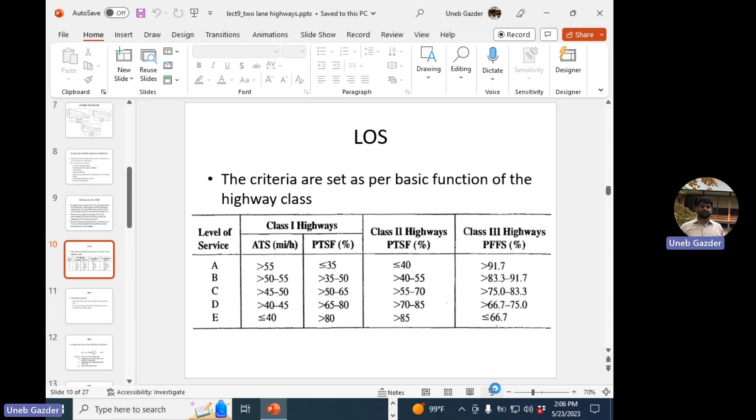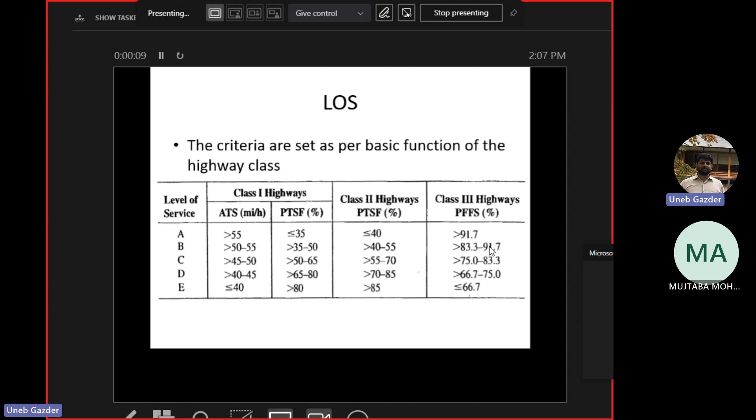Okay, you asked him about time. When I started teaching, I was teaching in Pakistan. I used to teach in T-shirt and jeans. The weather is like this. Sometimes they have AC, sometimes no. Never had AC. Sometimes the fans were okay.

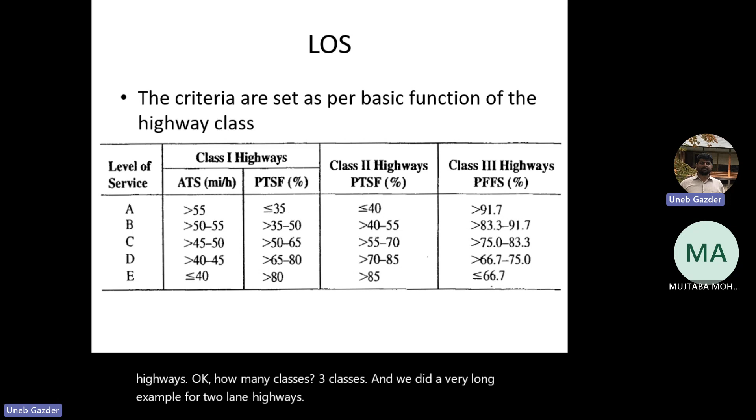So we were doing the topic of two-lane highways. Okay. How many classes? 3 classes. Okay. And we did a very long example for two-lane highways, but we only did one direction. I told you you can do the other direction. Just repeat the same process. You have to switch the volumes.

Okay. And another thing which I mentioned, that we did it only for class 1. And the good thing about class 1 is we got to do the calculations of ATS and PTSF both. Now for class 2, I will only do the calculations for what? PTSF. And for class 3, I will only do the calculations for what? ATS. Okay, but after calculating ATS, you have to do an extra step to find out the level of service.

Because for class 3, level of service does not depend upon ATS. It depends upon what? PFFS, percent free flow speed. Okay, so this one is a ratio of ATS and free flow speed. Okay, so that's why you need to calculate ATS. Okay.

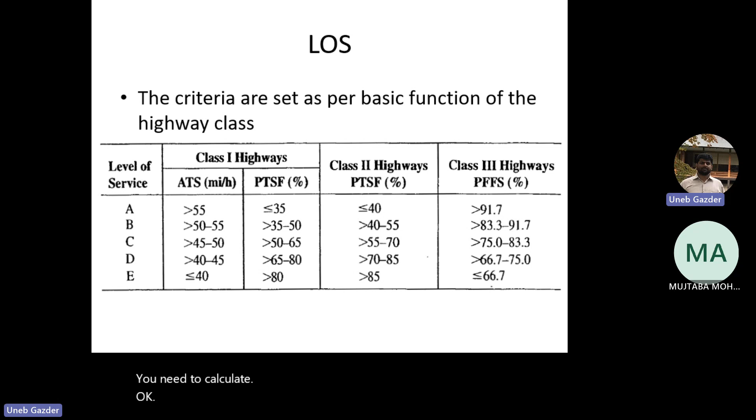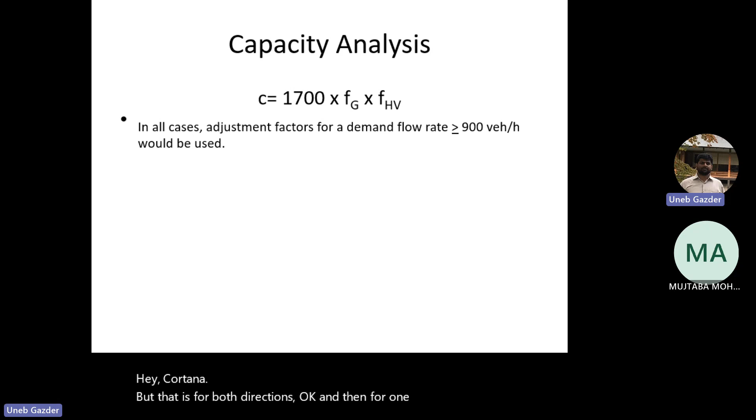Okay. Another thing is calculation of capacity for two-lane highways. What is the ideal capacity for two-lane highways? Anybody remembers? The ideal capacity, the best value for two-lane highways. 3,000. Okay, close enough. 3,200, but that is for both directions. Okay, and then for one direction, 1,700. Now this is ideal capacity.

If you remember, I showed you a table in which ideal capacities were given even for multi-lane highways and freeways as well in the last chapter. So those are in ideal conditions. But the highway has its own conditions which we call prevailing conditions. If you remember, the word appeared in the capacity definition, prevailing conditions.

So what will be the capacity of the highway under the given conditions? It would have been 3,200 if the conditions were ideal. They are not ideal. Capacity will be calculated as this. And this will give you capacity of one direction. So ideal capacity is what? 1,700 for one direction. And then we multiply with 2 adjustment factors for what?

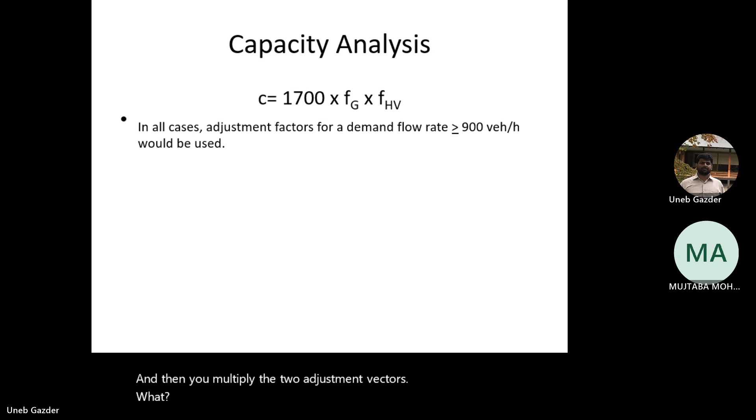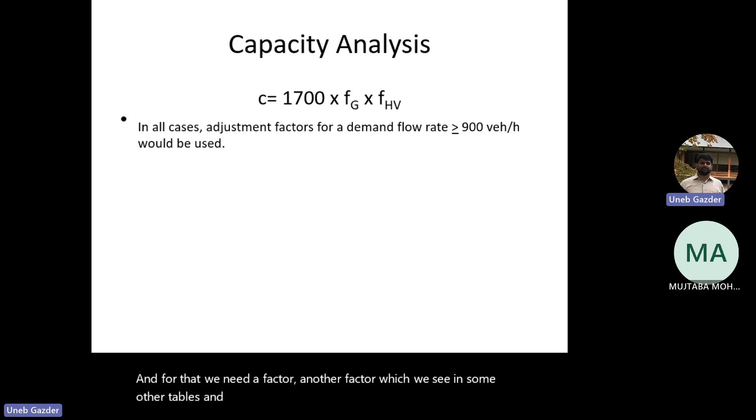These are factors for gradient and heavy vehicles. And both of them depend upon terrain. Both of them depend upon terrain, but their tables are different. FHV we calculate, and for that we need another factor which we see in some other tables, and FG we directly take from a table.

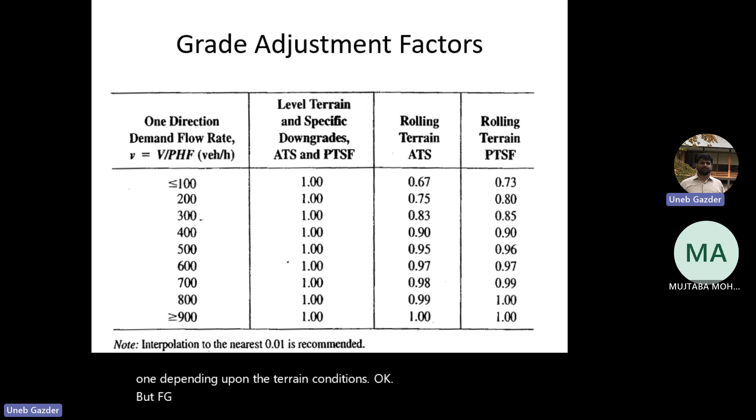Okay. Now if I go back to the tables which I showed you for FG, okay, these are the tables. You can use this one, the previous one, or this one, depending upon the terrain conditions. Okay. But FG also depends upon the flow. In all these tables, we are using flow as well. Okay, so which FG value should I take? Because I am calculating capacity of the road. So what is my flow?

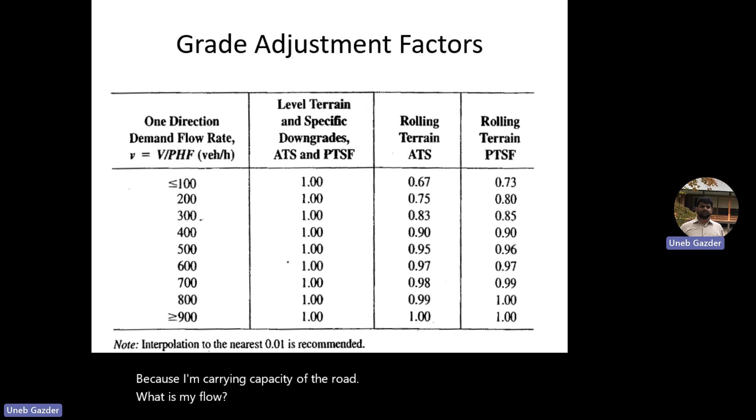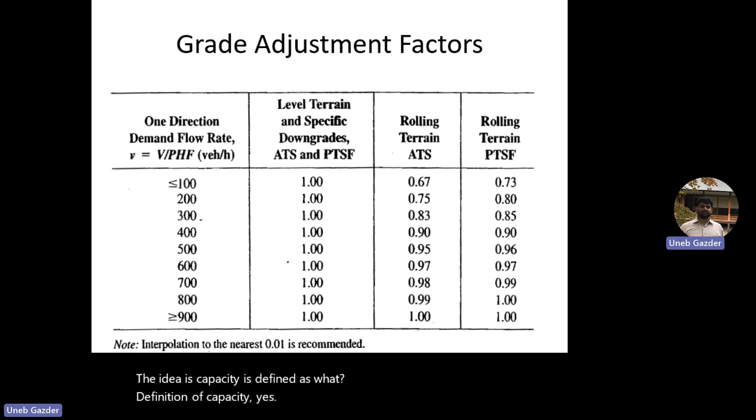1,700. Okay. Somehow correct. Yeah. Any other idea? Over 900. Over 900. Okay. Capacity is defined as what? Definition of capacity is maximum flow rate, right? So whatever gives the maximum flow rate. Like I said, you are correct. But the logic behind it is whatever gives the maximum.

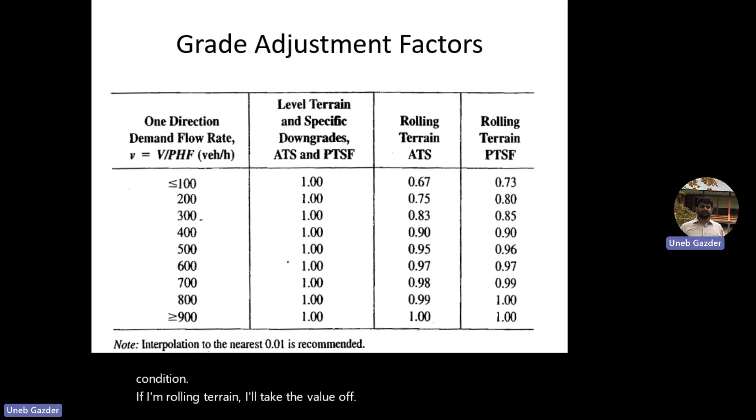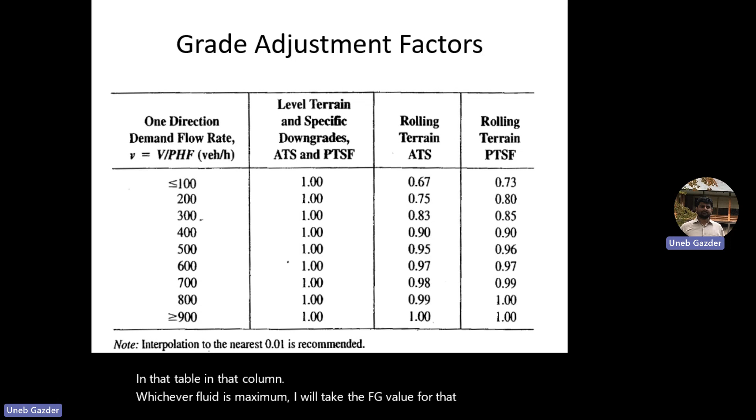So I'll take the value for the maximum flow rate for any condition. If I have rolling terrain, I take the value of FG for rolling terrain for the maximum flow rate. If I have a gradient, I'll go to the gradient table. I'll take the value for that gradient for maximum flow rate. Got it? So in that table, in that column, whichever flow rate is maximum, I will take the FG value for that. Okay? And FHV, we calculate like we calculate. It has nothing to do with the flow rate.

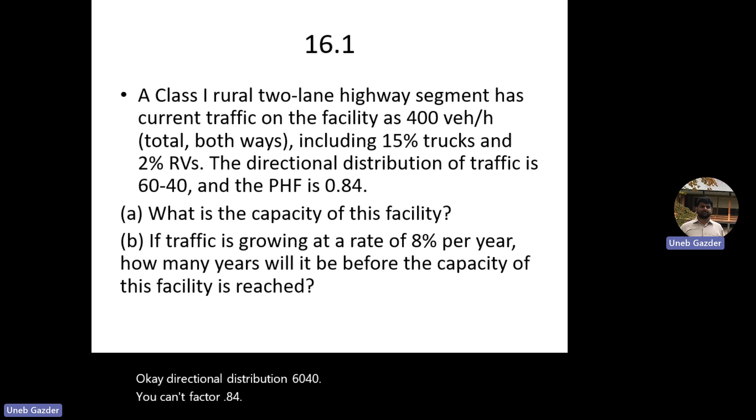Okay. Class 1 two-lane rural highway segment, current traffic 400. Okay, and we have 15% trucks, 2% RVs. As we have been doing, we will combine them. Okay, directional distribution 60-40. Peak hour factor 0.84. Class 1, 400. Okay, 15 and 2%.

Capacity of this facility, okay, and 8% per year. In how many years will it reach the capacity? Okay. Capacity of the facility means for both directions. Okay. When they say capacity of the facility, they mean the total of both directions. We have the equation for capacity, right?

They should have mentioned the terrain. It's missing. Yeah. See.

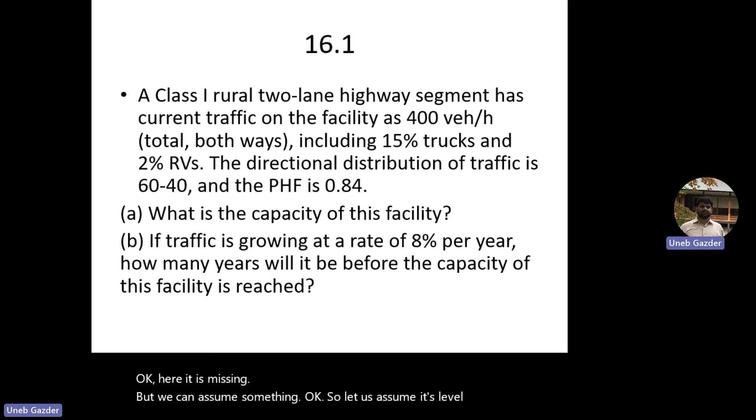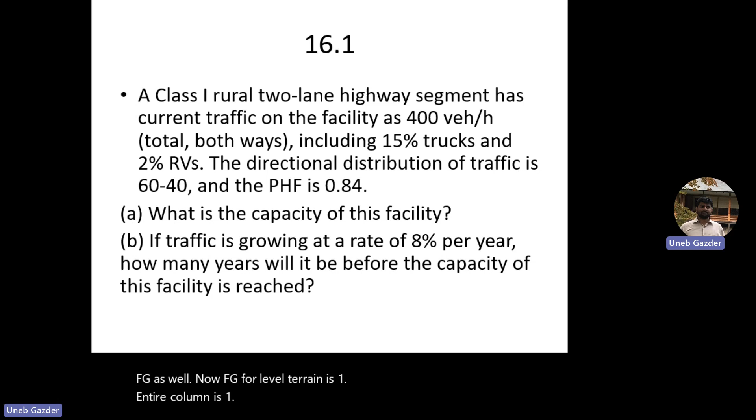Okay, and then we need the capacity. So we will take 1700 and, sorry, then we need FG as well. Now FG for level terrain is 1. The entire column is 1, because obviously this is the factor for gradient and you have no gradient, so the factor is 1. So capacity is 1700 multiplied by FG and FHV. FG is 1. So the capacity is how much? 1,445.

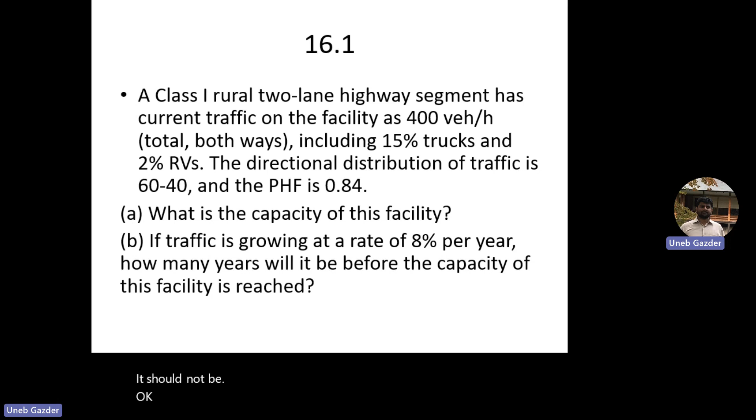Why am I writing passenger cars per hour? It should not be passenger cars per hour. It should be vehicles per hour per lane. So why is it vehicles per hour per lane? Heavy vehicles are included. And what else? What were the units for this 1,700? They are passenger cars per hour per lane.

So you multiply with FHV, it became vehicles per hour from passenger cars per hour. Then you multiply by FG, it doesn't change the units. But 1,700 itself is per lane, for one direction, so the final answer is also per lane. Did I solve part A? Is the capacity 1,445? Only for one direction. So what should I do? Multiply by 2.

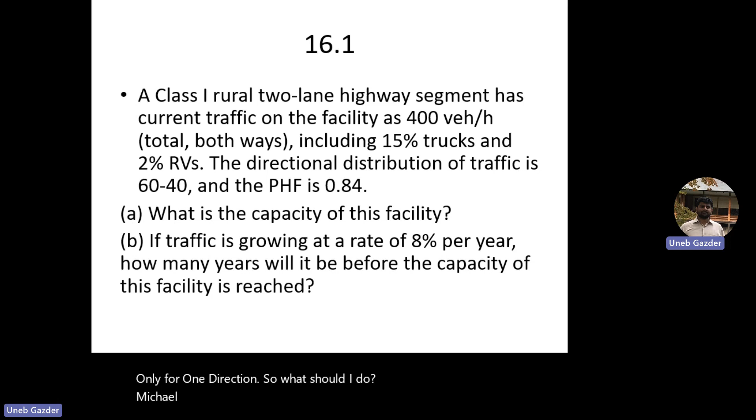60-40 distribution. Which one is this? 60, right? The higher one. So what should I do to make it 100? I got the 60 of the total. How do I get the total? This answer equals x multiplied by 0.6. 1445 equals x multiplied by 0.6, so x will be the total capacity. How much? 2408.

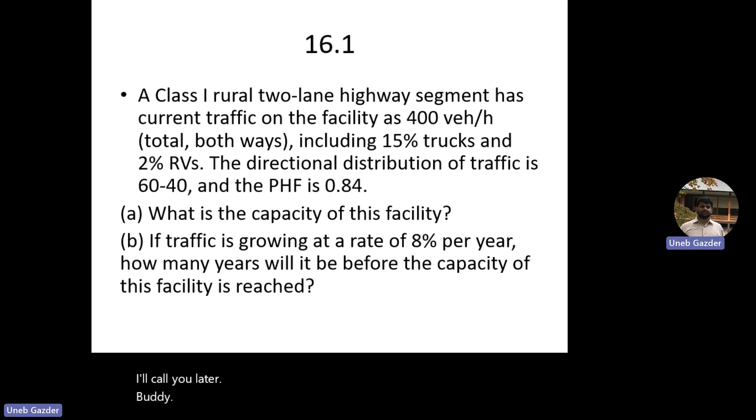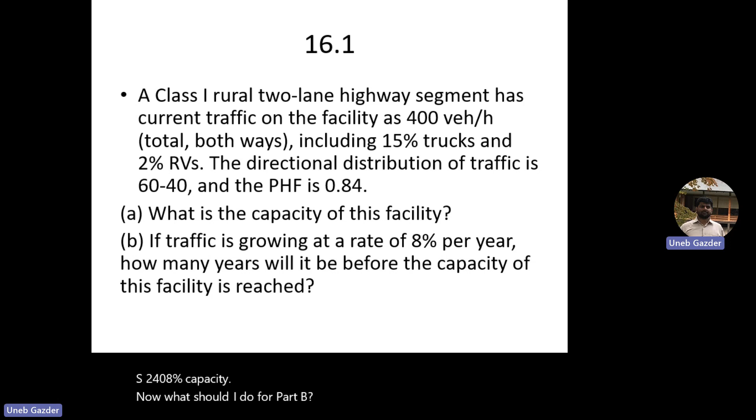Sorry. Okay. So this is for part A. The total is 2,408 total capacity. Now what should I do for part B? We have an equation, right? From that equation I am trying to calculate n, how many years. So the equation is right here.

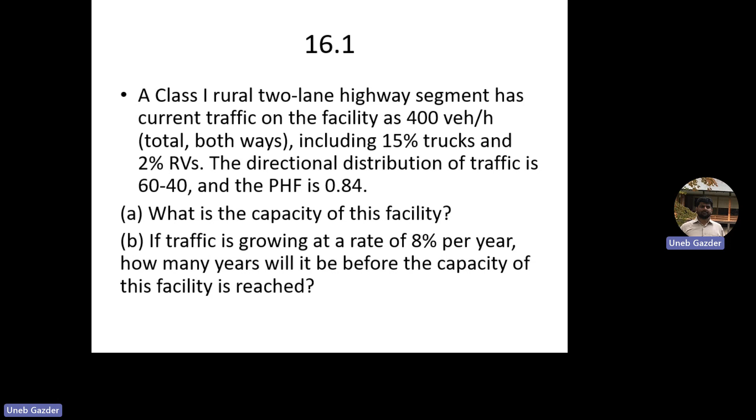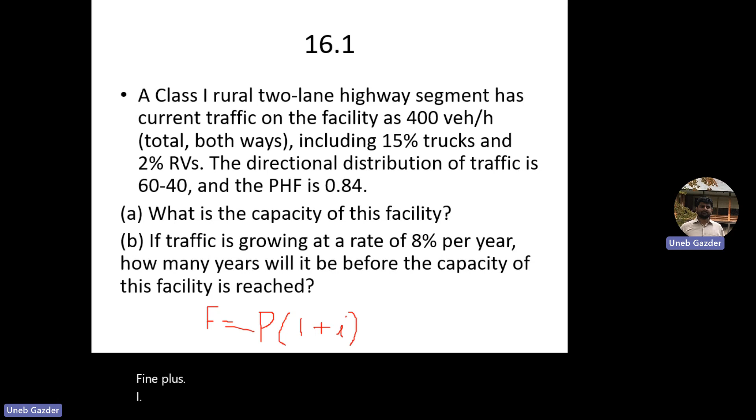F equals the present value times (1 plus i) to the power n. I'm trying to find out n here. i is 8%. Present value, you can see it, right? Present traffic: they are asking me when will the present traffic reach the capacity. So the present value is 400. Clear?

Capacity will not change. You cannot apply the growth rate on capacity; every year capacity will not increase. What is increasing? The current demand, which right now is 400. So they're asking when will it reach capacity. But there's a small point here. 400 is volume, and capacity 2408 is what? Flow rate. So I cannot put flow rate and volume in the same equation.

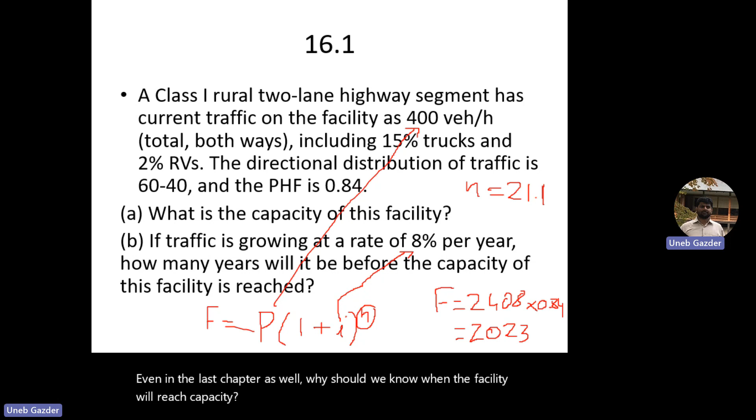And why did they ask me to do it? I gave the reason in the last chapter as well. Why should we know when the facility will reach capacity? They can start planning from now. Any questions? Everything is clear? Okay.

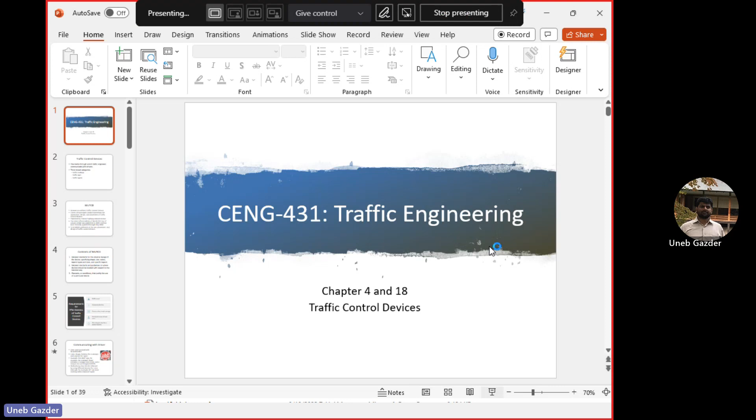I will tell you what happened. In one of the previous exams, last semester or before, I don't remember, they selected one topic and I excluded it. Then a question came from some other topic. They said, doctor, this is what we excluded. But they didn't see that the same topic was used in some other lecture as well. Get my point? So I excluded the topic, and still I gave the question. Magic.

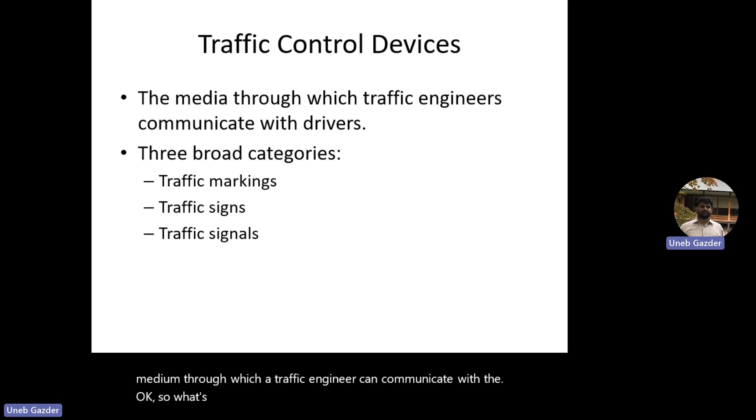So what is a traffic control device? Traffic control device means any medium through which a traffic engineer can communicate with the driver. So WhatsApp, Instagram, TikTok, all these things are not included. There are 3 types of traffic control devices: traffic markings, traffic signs, and traffic signals. These are the 3 main categories. Then in each one of them, we have subcategories as well. We will talk about them.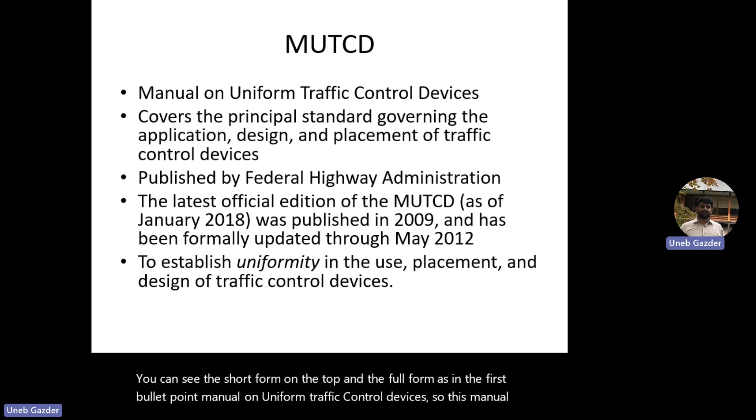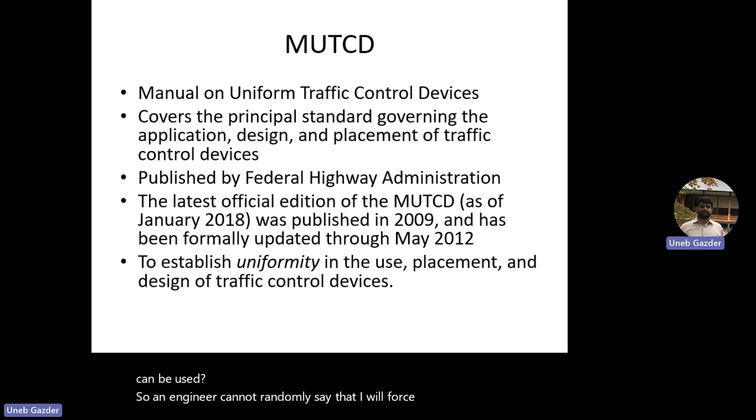The standards for designing traffic control devices are given in a manual called the Manual on Uniform Traffic Control Devices. You can see the short form on the top, and the full form is in the first bullet point. This manual only contains the standards about traffic control devices. So what type of standards should we know? The application of the traffic control device: in which situation, which device can be used. An engineer cannot randomly say I will put a signal on this intersection, I will put a roundabout here. There are some standards which you have to follow.

Then what should be the design of the device? The design and placement. Where would I put the device? If I am designing a signal, where should I put the signal? If I am going for a sign, where should I put the sign? Middle of the road, side of the road, higher, lower. All these standards should be taken into account when you are designing traffic control devices. This manual is published by FHWA, the Federal Highway Administration.

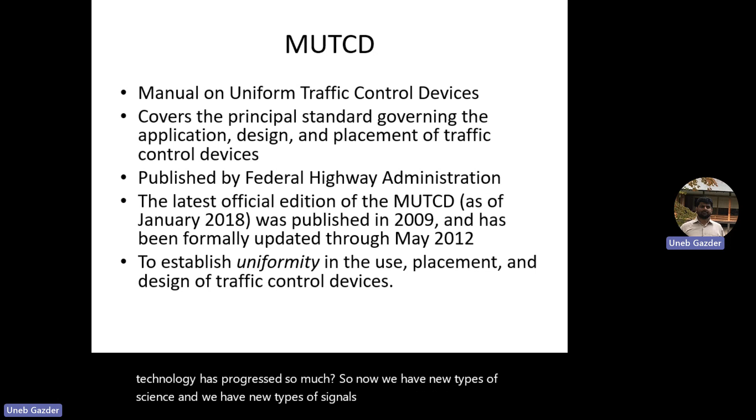I haven't seen any update after 2012. You may be asking why we are still using this manual when technology has progressed so much. Now we have new types of signs and new types of signals. After 2012, 11 years, a lot of changes have been made. Now we have sensors and all. But where should I use the signal, the design of the signal, and where should I put the signal? These standards have not changed.

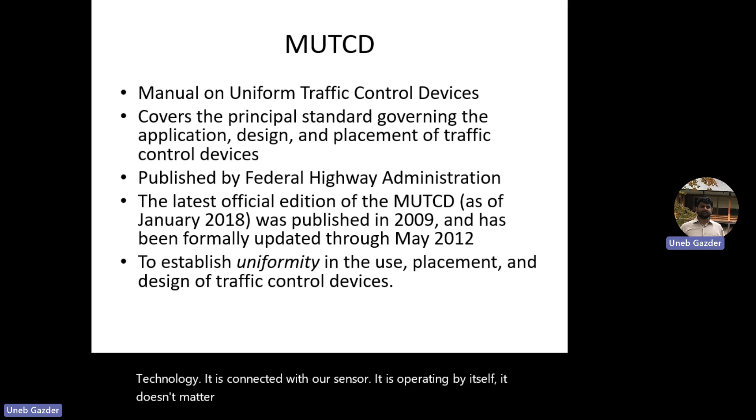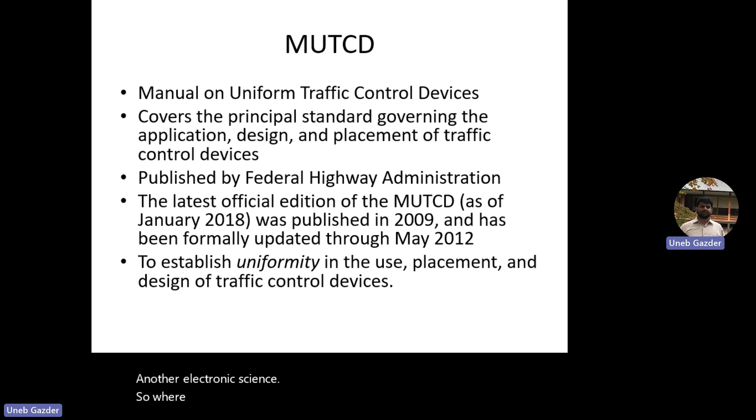We are still using the same 3 lights. There are some specific places where you put the signal. Even if the signal is of a new technology, connected with a sensor, operating by itself, it doesn't matter. These things will remain the same, whatever type of signal you are using. Now we have electronic signs. I will not put a static steel sign board there; I will put an electronic sign which changes. But still, where should I put the sign? What colors will I use? Same.

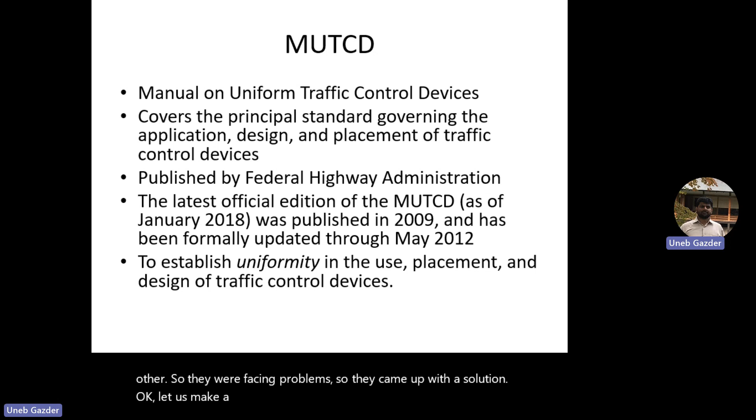And why do we need standards for traffic control devices? So that we have uniformity, consistency, similarity in their use, placement, and design. Now we have international driving licenses. This started basically in the US, and still there are a lot of changes in traffic regulations from one US state to the other. Drivers are moving around from one place to the other, so they were facing problems. They came up with a solution: let us make one manual which will be followed by everybody. If it is good for a huge country like the US, which has a lot of variations in terrain and climate, other people also adopt it. So this is the reason.

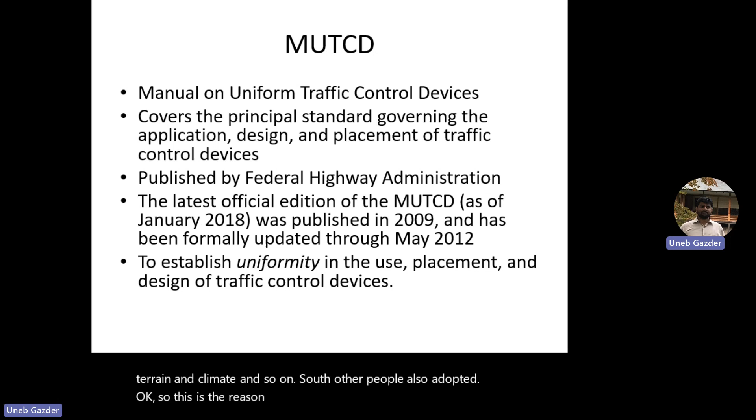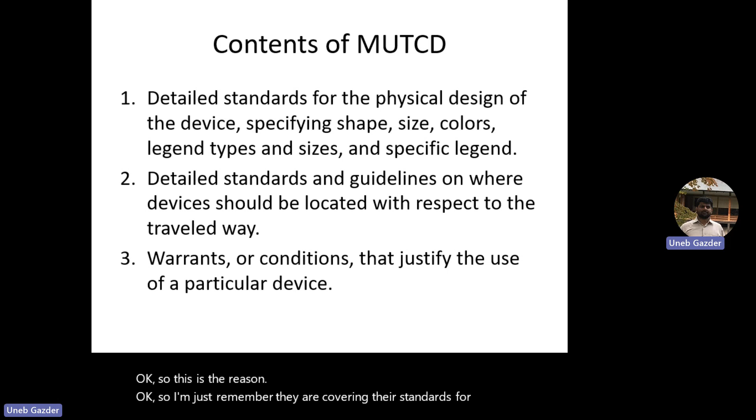Okay, so in this manual, they are covering the standards for design of the device. Design means what? The shape of the device, size, colors, what legend you will use on the device. Legend meaning what? What is the legend? What is the legend?

Somebody is very old, right? He died protecting his country.

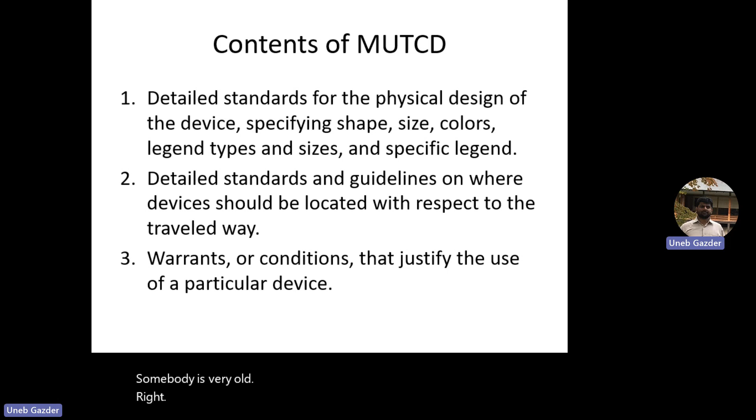What is the legend? Icon, symbol, something like this. Okay. So, what type of legend you are using? Okay, symbols and these things. The size, the font size of the legend itself, the design of the specific legend, and so on. And it also contains standards and guidelines on where you should put the device with respect to the road. From the road, how far or how near should the device be.

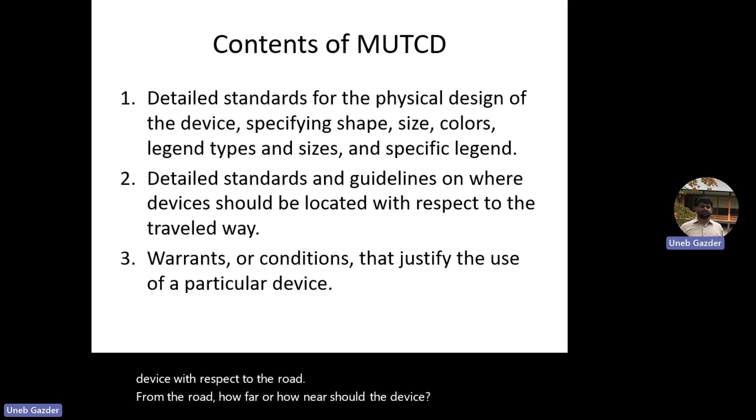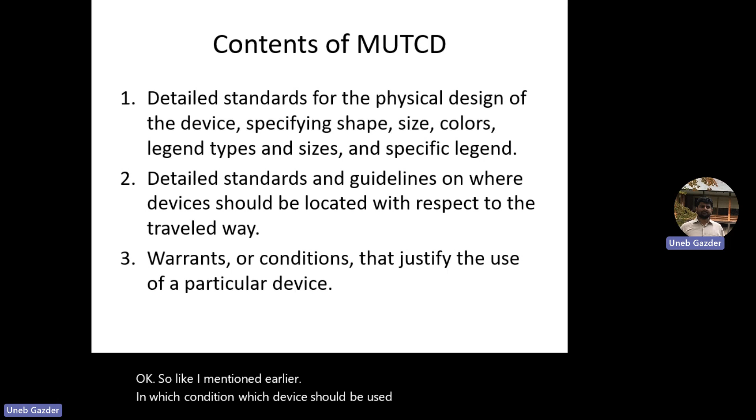And the warrants and conditions. Okay, so like I mentioned earlier, in which condition, which device should be used. So the manual contains the standards about all these things, and these are the things we should also consider whenever you are designing a device. Okay. An effective traffic control device should have these components. An effective traffic control device should have these requirements to be an effective control device. If you are not fulfilling these points, your control device is not effective.

Okay, it should fulfill a need. So, for example, you see traffic signs for speed limits. We use them where we need them. So you will not see a speed limit sign beside a signal. It's not required there. Signal itself tells the driver when to move and when to stop. Okay, so you don't need to put an extra condition on the driver: when you will be moving, your speed should be this much. Okay, so we will put the speed limit sign where we feel the driver may overspeed. It could be dangerous. Then we put it there.

Okay, you may see those orange cones. Where do they put these orange cones on the road? Intersection without signal. Okay. Maintenance. If they have some maintenance activity going on, so again, you can only use them there. You cannot come up and say, okay, I will put it here because this road looks dangerous or there's a pothole or something. No. Okay. So each device should be put where it is needed. Not needed, we will not put it.

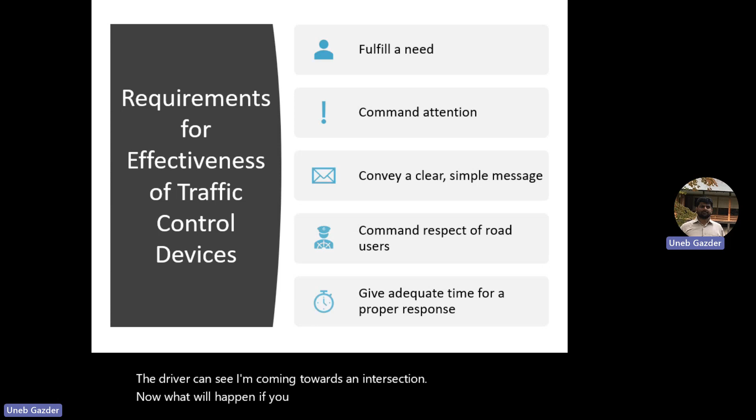Commanding respect means the driver should know the importance of the sign. He should feel, if I don't follow this, there will be something dangerous for me. Okay. Or I will have some sort of loss. Okay. So, for example, there is a sign or there is a marking which says this lane for left turning. Okay. And the driver can see I am coming towards an intersection. Now what will happen if you are not in that lane? You want to take a left turn, or let's say you don't want to take a left turn but you are still in that lane. What will happen?

You have to change lane, but if you are in the wrong lane, you may not have the chance. The other lanes may be too full, you may not have the chance to change the lanes. Even if you try, you may cause an accident or traffic jam. The driver has to stop for you. So you can see the need. I have to be in my lane, otherwise it will be dangerous, and I will waste my time and others' time.

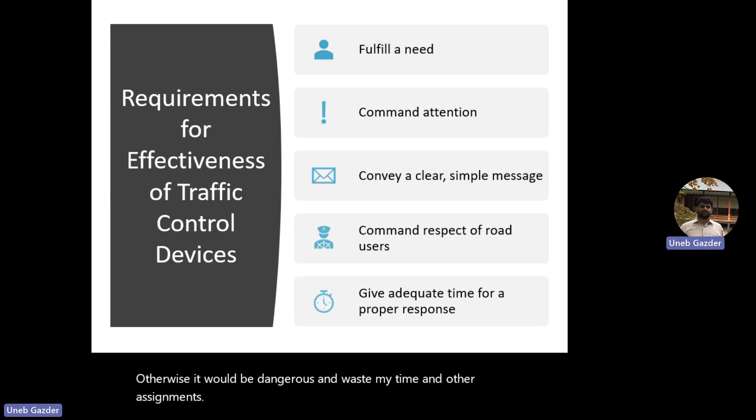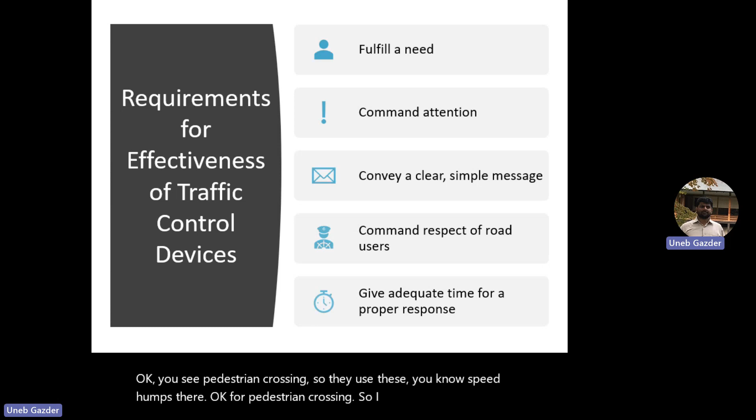Got it? Okay. You see a pedestrian crossing, so they use these speed humps there. So I can see that there is a speed hump, and I can see that it's a pedestrian crossing. So I feel the need, I should reduce my speed. Got it? So every device, this is how you command the respect of the road users.

But it is directly linked with one of the previous three points. Which one? Attention. A sign clearly says this way to Mohalla. So what? I saw the sign, fine. Do I feel the need to obey? No. That's it. She made it very easy for us. Okay, it's the first one. Good.

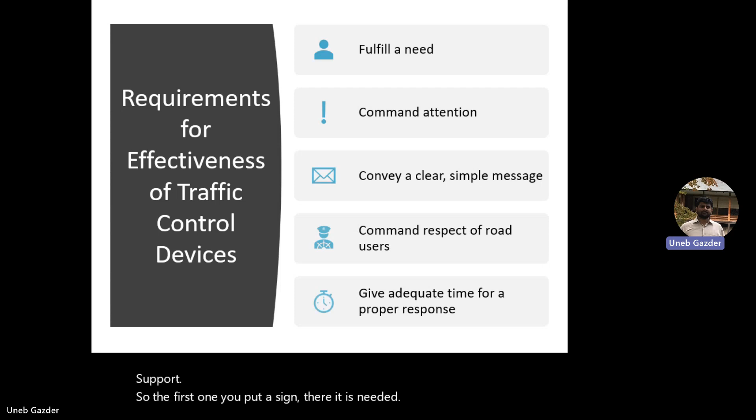It's the first one. You put the device where it is needed. So if I see the need, I know how to follow it. I can give you the example of the pedestrian crossing. You put the speed hump where there was a pedestrian crossing, so I can see it, and I know I have to reduce my speed. Otherwise, it will be dangerous. I'm at an intersection, so even if I don't see it, I'll be looking for it. In which lane should I go?

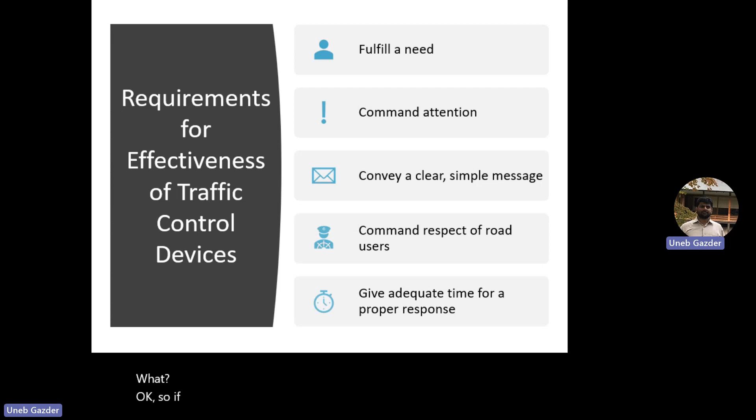Get my point? So if there was a need, and then you fulfill that need with a traffic control device, eventually the driver is looking for your advice. At that point, the driver is looking for your advice. What should I do? Because there's already a need.

Have you observed yourselves when you are on a highway? You don't see any intersections, it's a long, clear, wide road, and you are speeding. After some time, you will yourself feel the need: I should be looking for the speed limit. Maybe I'm overspeeding. Because you know there's a law, there can be cameras. So even if you missed it, you have in the back of your mind that at this location maybe you're overspeeding. So this is what they are saying.

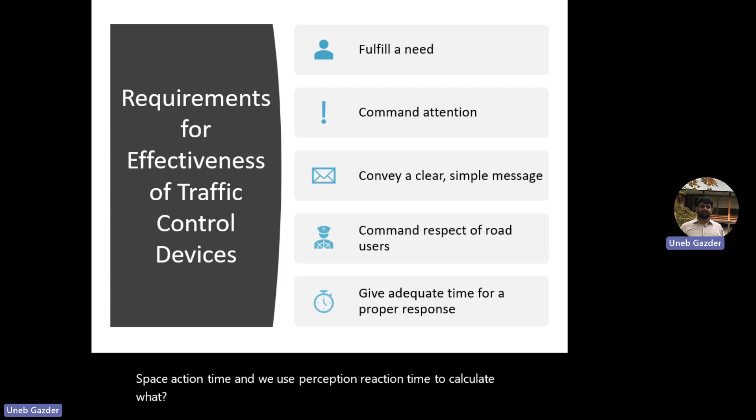And the last one, we already talked about it. Give adequate time for proper response. How do we give a proper response time? Perception reaction time, and we use perception reaction time to calculate what? Sight distance. So sight distance should be enough. If the sight distance is enough, then you have the proper response time.

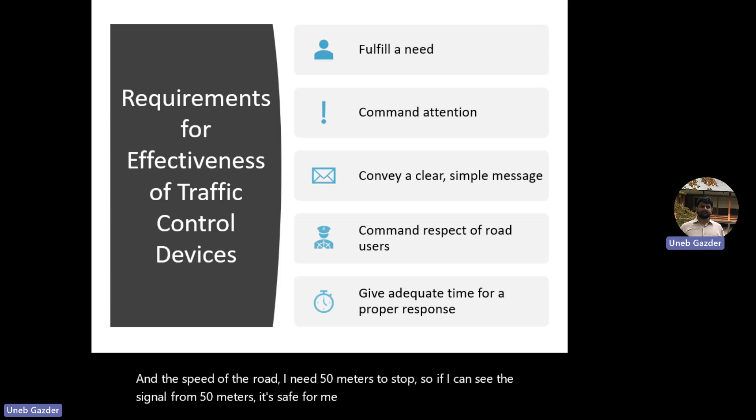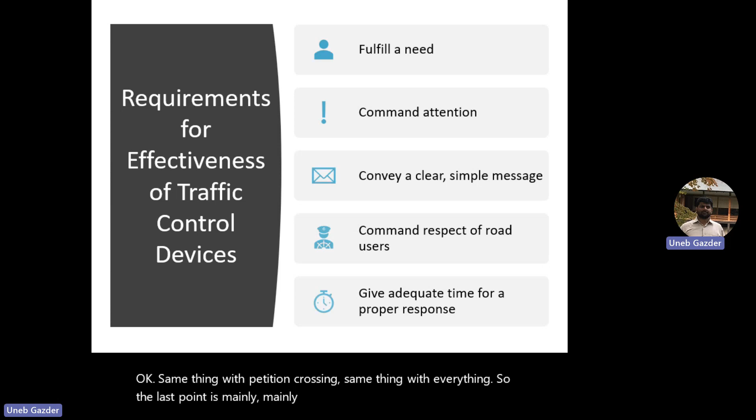On a signal, you have the sight distance for stopping. For example, I need 50 meters to stop at the speed of the road. So if I can see the signal from 50 meters, it's safe for me. I will stop. But if I can only see the signal from 10 meters, even if I try, I cannot stop. Same thing with pedestrian crossing, same thing with everything. So the last point is mainly linked with sight distance. You have enough sight distance, you have proper response time. Clear?

The communication with the driver should be clear and as per standard, with redundancy. Clear and standard we already talked about. Now what do we mean by redundancy? There are redundant members in trusses. Yeah, multiple times. But redundancy basically means you are doing something which may not be required. It's something extra. Most drivers do not need the message to be repeated, but we do it for the purpose of safety.

Now how do we do it? We do it through the design of the device. For example, a sign with a red color usually means to slow down or to stop. So even if I don't see the number or word on the sign, it is catching my attention. There is something to be cautious about, I should probably reduce my speed. So the color, even if you miss the number, tells you it's something related to slowing down or to a danger. Even the design of the signal. Which light do we have on the top?

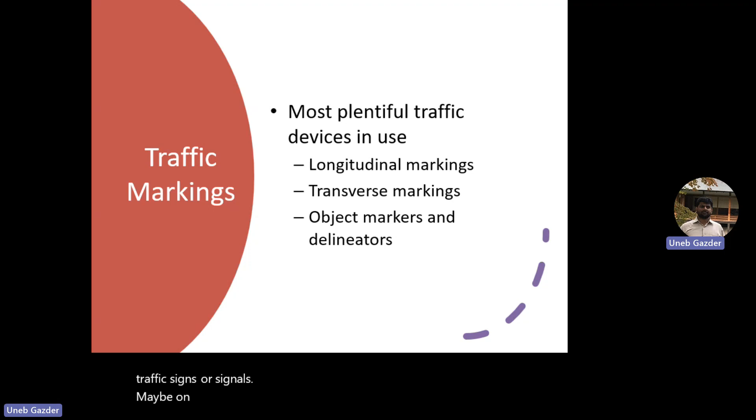Types of devices - we have 3 types: traffic markings, signals, and signs. Traffic markings are the most commonly used devices, more common than any other. You will not see traffic signs or signals at all locations, but at maybe 95% of locations there must be some marking. So they are the most commonly used, plentiful devices, and these can be divided into 3 categories: longitudinal, transverse, and object markers and delineators.

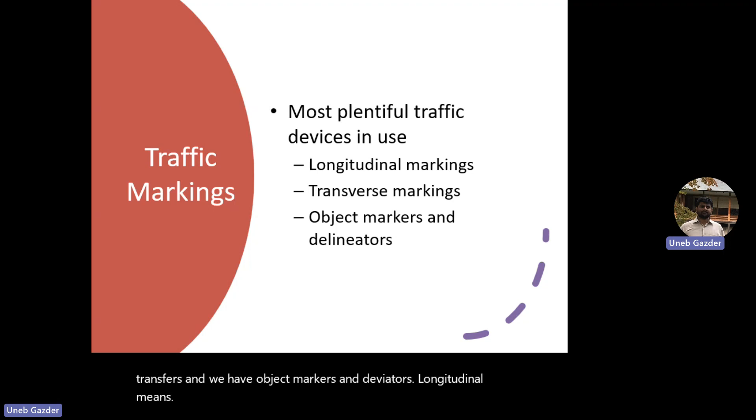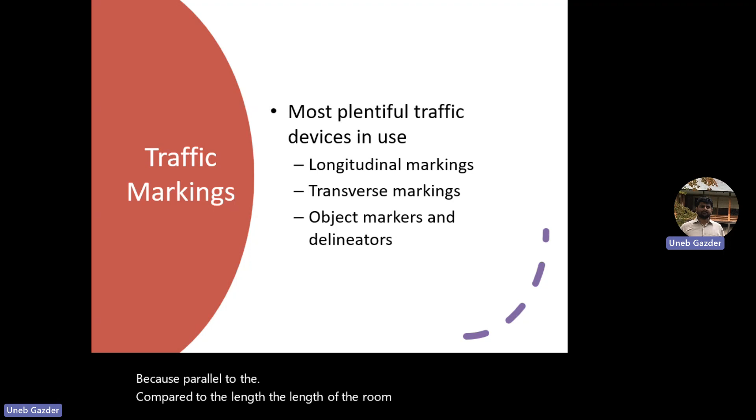Longitudinal means if I say something is longitudinal, it is along, parallel to the length of the road. So which markings are parallel to the road? The white one - these are for dividing the lanes. Any other example for longitudinal marking? Shoulder markings. In some cases, the median is also marked, with a white line.

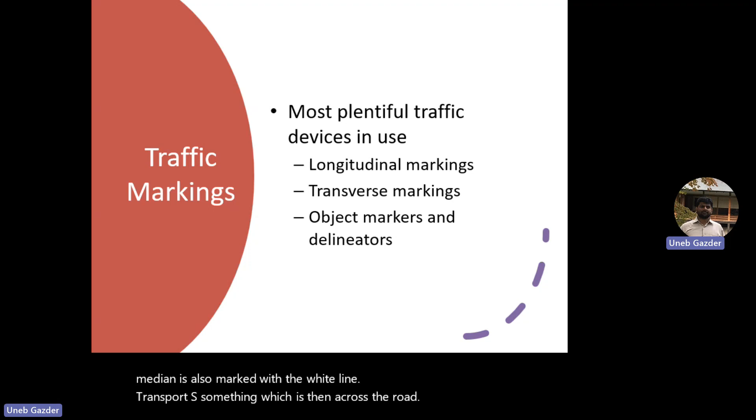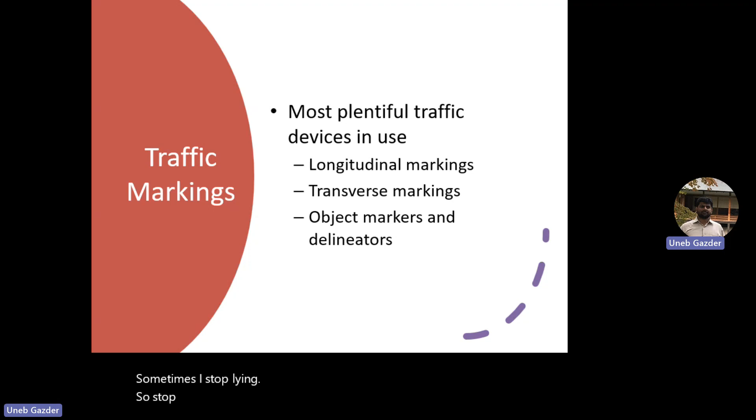Transverse is something done across the road at any angle from the length - it may not be 90 degrees, but it's transverse. Give me a couple of examples. Pedestrian crossing - what else? Just before pedestrian crossing we have another line, a zigzag, for the pedestrian. And before that, sometimes a stop line - the stop line is also transverse. Parking markings, if you are parking beside the road, are also transverse, in many cases.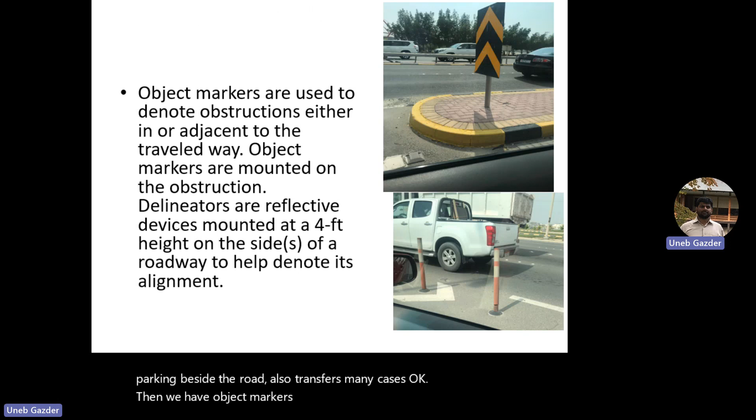Then we have object markers and delineators. So object marker, the top one - this thing, this one is an object marker. And these small orange and white bars are delineators. Object markers are used to tell you that now you have to change your direction - you cannot continue, this is the end of the lane, end of the road for you. Now from this point onwards, you have to go right or left. There is no straight for you.

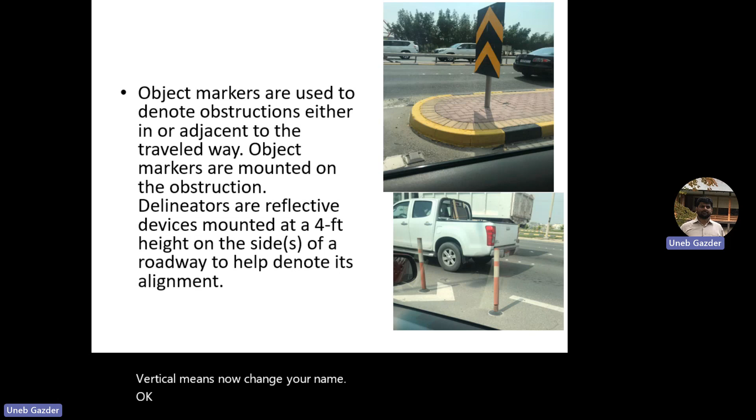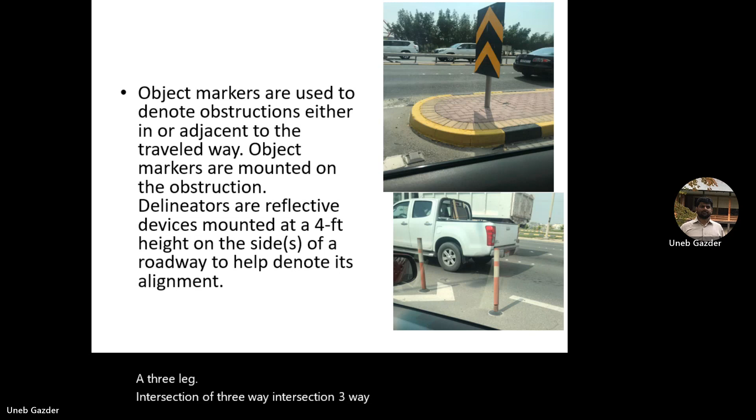In some cases, like in this picture, they are vertical - meaning now change your lane. I took this picture in front of the Indian school near the traffic island for left turning. So if you are coming straight, you see this: either go right if you want to go straight, or go left if you want to go left. But sometimes we have them in horizontal position, when you have a three-leg intersection or three-way junction. So you are coming now, and this is a dead end - you cannot go straight, you have to take a right turn or left turn. In that case, they make it horizontal. So object markers are basically telling you the end of the road, asking you to divert now.

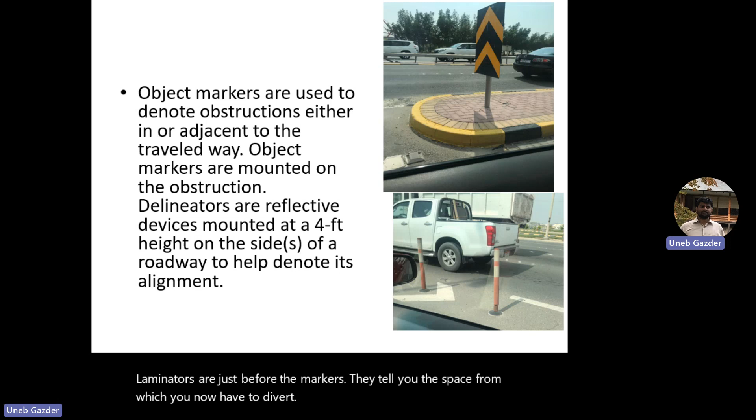Delineators are just before the markers. They tell you the space from which you now have to divert. So you will see these delineators near the ramps as well - there is a ramp now, and I have to tell the driver from this point onwards, change your lane, you cannot continue. So delineators are now diverting the driver to a specific direction.

So object markers are like a warning sign, and delineators are for guidance. From which point do I stop following it? I see the delineator, so from here I have to follow this line, follow the delineators.

Got it? Now why are we discussing them in traffic markings? They are not markings. Are there markings on the ground? No. We can include them in signs. They are definitely not signals. We could include them in signs, but we don't, because of their design and size.

Okay, they are somewhere in between. The marking is obviously on the ground, right? And signs are usually more than 4 feet above the ground. They have less. So we had to include them in one category or the other, and they decided to put them in markings. Because of their size, traffic signs are usually higher and bigger.

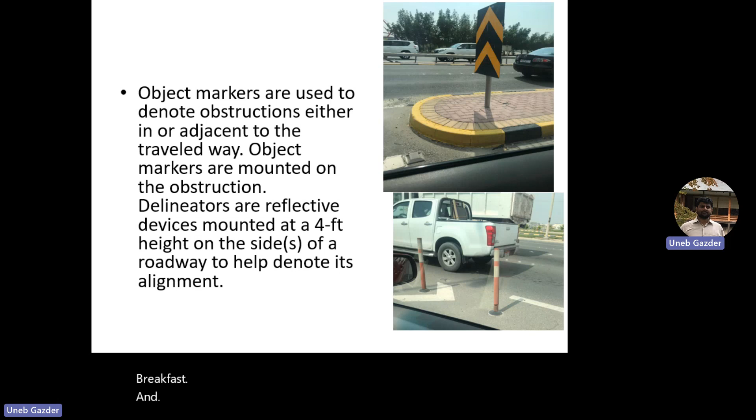About the project, I finished the calculations, only the application part is left. I asked my friend who said he already did the application. Did you download it? I downloaded it. I'll do it with one of them who is already doing it.

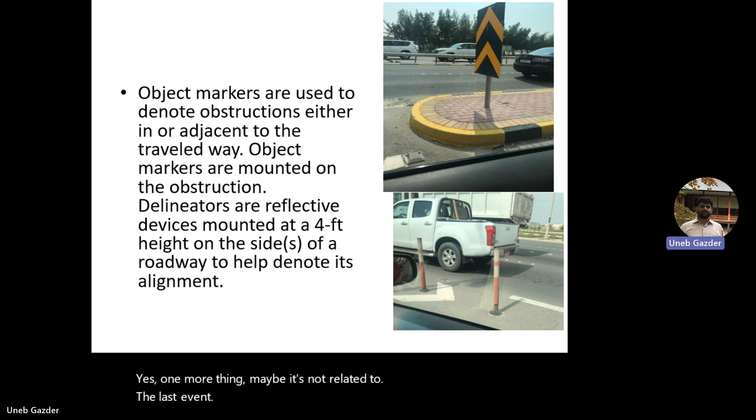One more thing, maybe it's not related. The last event I attended with the University of Michigan, they used to give a certificate. I didn't get it yet. It was before March, it was like on 2 days.

I think it comes on your app, right? With an app. Should I do anything with the app now? Sure, sure. Yeah.

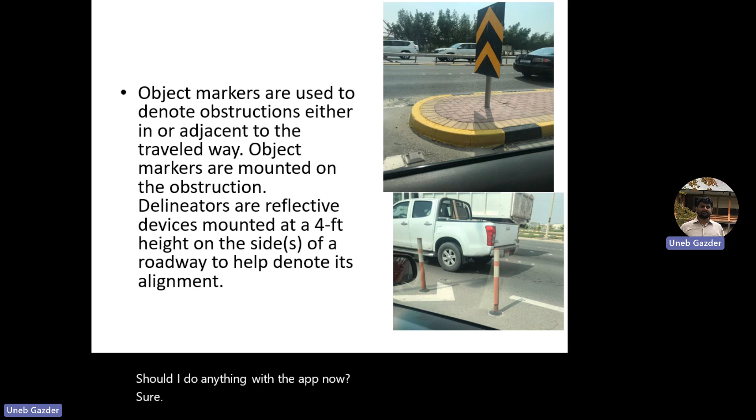Victor, for the presentation, let's control the time. Today is what? After the presentation, 28th, inshallah. No, if you want to do it later I don't mind, but it will be getting closer to your exams.

Did you talk to someone? Maybe we can include his or her name from the start as a co-author. If they agree, it will be good for them as well, since they will already have a group. Because when they announce the topics, that person may already have their own groups and say no, I already have 4 groups.

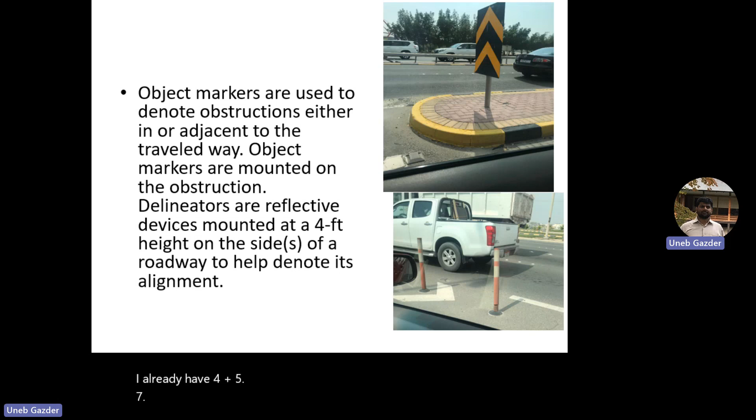Theory from lecture 7 onwards, Thursday we will finish whatever we covered. But even if we go through some numericals, it's just for the sake of the class. In the final exam, I will not include numericals.

You cancel it? Yes. You don't study from it. No. Who told you that you have to study all the time? One guy told me he wants to study.

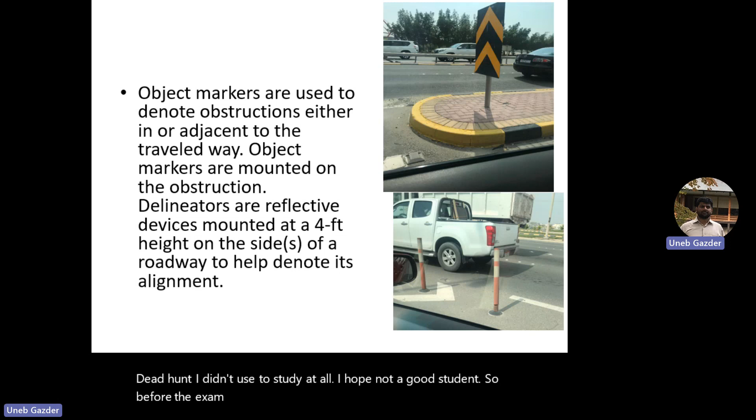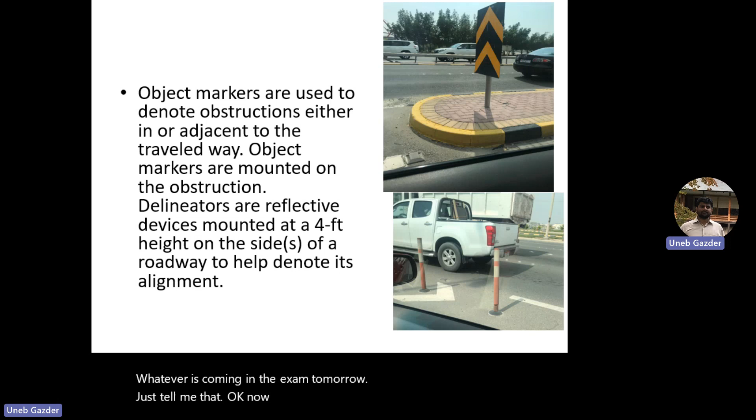He didn't used to study at all. He is a famous guy in Pakistan, from his own team. He said, I didn't used to study at all, I was not a good student. So before the final exam, he would pray to God, asking whatever is coming in the exam tomorrow. Then he'd open the book, and from whichever page it opened, he would only study that. According to him, because of his prayer, only that part came in the exam. You want to try? No.

And tell me if it works. Inshallah, I'm not worried about you, you're a good student, be confident. At the time of the exam just relax, you guys lose more marks because you're overthinking what to do. If you know what to do, then you do nothing more, but not with you.